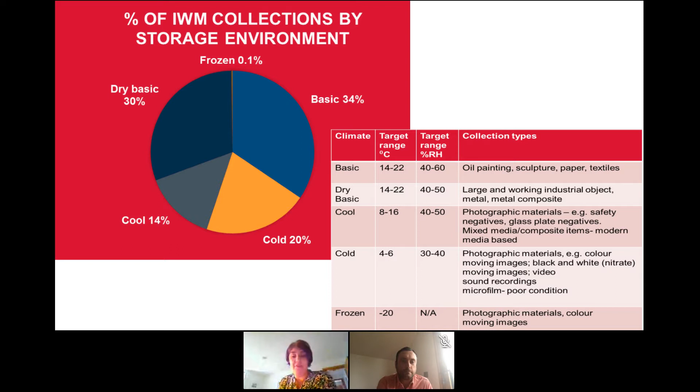One of the things that we've done at IWM is we've streamlined all of the environmental requirements into 5 very straightforward categories. And what we've found about doing that is it's far more successful when we work with other companies, either internal service providers or companies like Architype, when we've been developing new approaches. And over time, we've got more and more comfortable with the passive approach because we're seeing more and more evidence that it does exactly what we want it to.

I thought it was fun to just share a little bit of our journey with you from 2009. So we saw pictures from our art store, which was an internal reconfiguration of space. And you can see here what we're spending per square metre. And you can also see here how we're getting that cost down in real terms if you consider inflation and all of the other factors we're all facing, by just really consistently sticking with the logic of learning the lessons from past projects, travelling widely and finding out what the best approach can be.

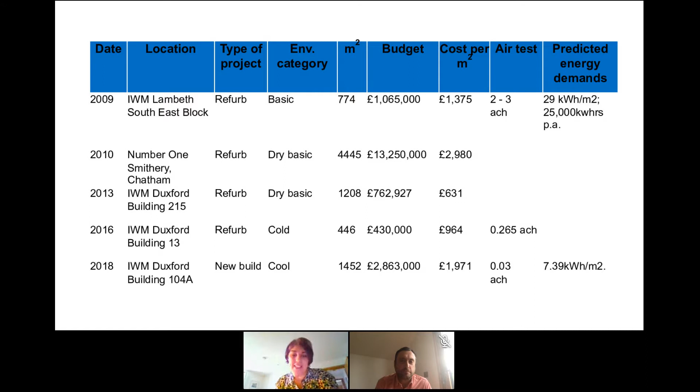And Mark will show you a great slide that compares, in the UK space at least, what we would expect, and we're now consistently below the expectations. I would also really advocate for trusting your own people. They know your spaces. They have skills and capabilities that you forget as a senior person who doesn't always see them doing their best work.

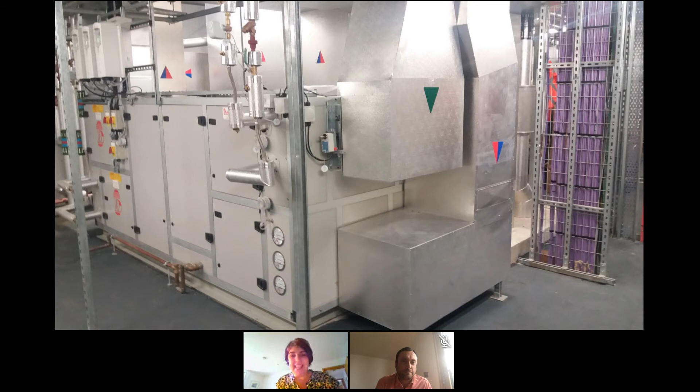So this is a great example. I sent the team off to look at other reference sites, and they came back with this photograph of the biggest plant room in a museum archive I've ever seen. This is one corner of it. We could have had a party in it. It was so enormous. And they came back and they were completely clear that they didn't want equipment like this. And they didn't want it because they didn't feel that our teams would always maintain that equipment properly.

So the idea of the passive house approach that we ended up with was really from our service teams going and looking at other stores that were spending a lot of money to meet very precise standards and coming back and saying, really, I don't think we're going to do this. So we prefer the passive approach because we feel like we're less likely to fail.

I think the other thing that we did well, and our technician team are always happy to connect and talk to technical teams in other places now, which is one of the great things that's come out of it, is that we trusted in the working practice. So there are other speakers who are going to talk about our work with barcoding. In fact, I went to Australia nearly 20 years ago now because they had implemented barcoding, and we looked at that very extensively, and then we chose to do it. And that gives us a lot of accurate information about our collection size and its movement.

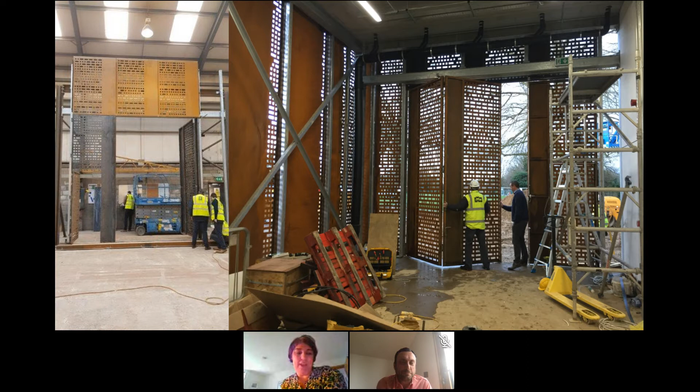They also went out, so you can see here, they went out to look at the loading bay door. The loading bay of this building had to do lots of different things. It had to be the plenum for our plant. It was on the corner of a very exposed site, so we needed to be able to move through it and for the door not to be blown off, which happens on some of our other buildings.

So again, just trusting those staff to really sign it off and come up with something really lightweight, minimising materials, and really giving them the confidence to say, yes, that will work. We're confident it will work. So our approach really has been to take any and every piece of advice from everybody else and apply it. And so we must now share that with you all.

I'm going to let Mark talk through the design approach, and then I think we should be able to have a nice conversation and pick up your questions about the more technical elements, particularly around environment. Mark.

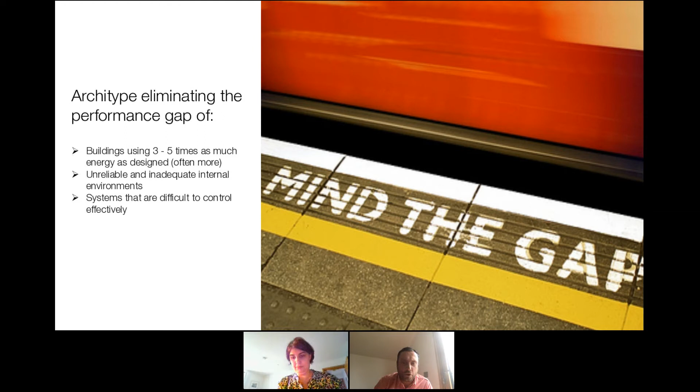So part of the integrated approach that we've taken, which is absolutely underpinned by those processes that Gail's just mentioned about co-developing building parameters with the design team, understanding building usage, and critically understanding operational procedures as well for the buildings. We utilize our specialisms in using evidence-based approaches. So that's employing strategies that we know work with our buildings, but also critically working alongside physics. It's much easier to work with physics than fight against it.

And then delivering in a fabric first approach, so concentrating on thermal performance and air tightness, which ultimately minimizes the risk of plant failure because we're providing passive environments. And critically, we are challenging standards as we go. We are confident in how our buildings will perform, and I'll demonstrate through a couple of examples shortly how we've successfully challenged and influenced those standards that have come out since our first work in this area.

Now, we came into this sector in an unorthodox way. But when we crashed into that sector, we found that our first project, which was Herefordshire Archives and Records Centre, had recently had its budget slashed to only 55% of what at the time the Arts Council were recommending for a building of that nature. So originally we thought, well, actually, is this project possible?

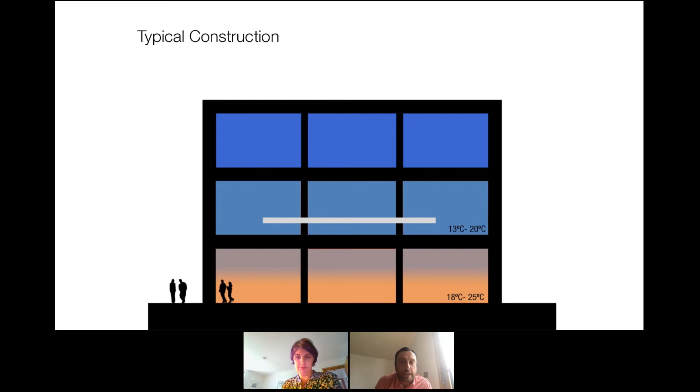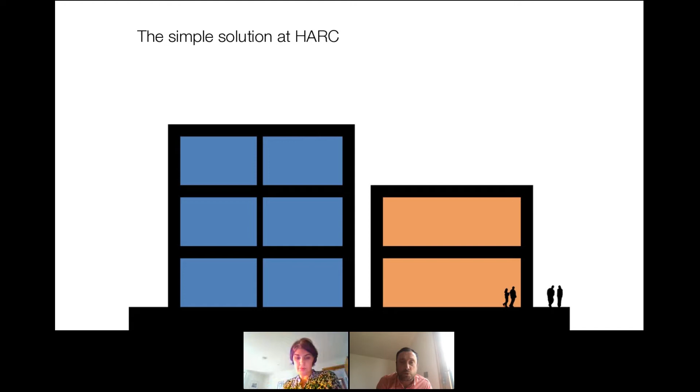So our radical but simple solution at HARC, the Herefordshire Archive, was to simply set the building out isolating each of the different environmental standards, and critically insulating each of those buildings or semi-detached elements of the buildings very well, including the wall between the two. The project was completed in 2014 and has been an incredible success. I'll share with you the performance from the buildings, but the target energy bills have been met, and also the target performance met too.

Now, critical to moving towards a passive solution is understanding the building physics around environments. And one of the things that we decided to do, very much inspired by the good work that had happened in Denmark previous to our introduction to the sector, was allowing the temperature to move and fluctuate across the year in order to keep a constant level of relative humidity throughout the year.

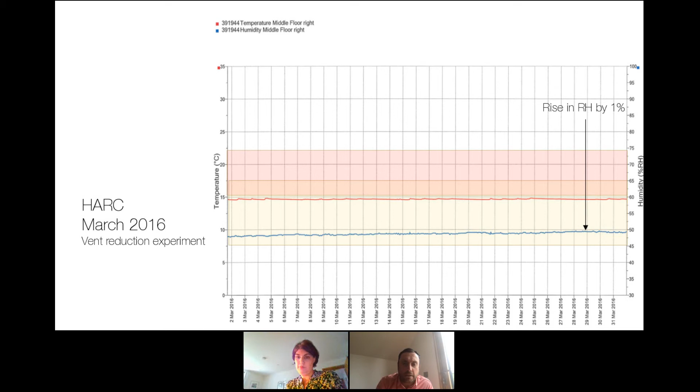Now, the other thing that we researched and were able to implement in our designs, and this particularly influenced how we moved on to design the paper store for Imperial War Museum, is that we soon realized that if there is a paper-based collection, then the moisture content of that collection has an ability to maintain moisture far more readily than RH. So a change of 1% in EMC is 13 times the amount of a 1% change in RH.

And we calculated that the maximum amount of water imbalance with the store that we were designing was about 10 kilograms of water per day. So if you multiply that out to a typical month, that would manifest in a typical change of about 0.2% in EMC, which only relates to a 2.6% change in RH, and that's the maximum imbalance of water, which is in the depths of winter.

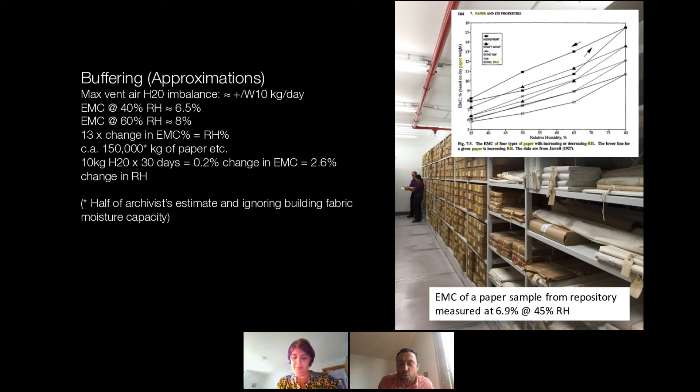So it was proving actually that the collection does most of the buffering. The standards and the guidance suggest that you use a hygroscopic construction, and we did that for HARC. Actually, where you've got a paper-based collection, moisture will find the passage of least resistance, and it will therefore be absorbed into the collection before almost all building fabric build-ups.

And then again, because these sorts of buildings haven't been done before, we have put probes into the buildings. We've put probes under the floor with Imperial War Museum, because we want to understand construction moisture and the speed of drying out, because we developed a system for both of our new build projects that avoided the need to have temporary tents above our buildings, which is often an expense to a project that can drift into the hundreds of thousands of pounds.

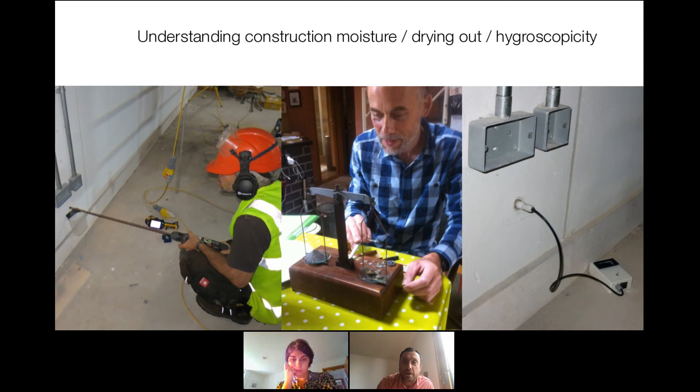So we developed a system that we were confident would be able to dry out quite quickly, and we've gained in the last few years a much clearer picture of how buildings, archives, behave in the drying out process, and we've been able to optimize our equipment further in subsequent projects. And in doing all this, we are hitting world-class performance

with our buildings. So Herefordshire delivered for the archive bit only 0.04 air changes per hour, which is approximately 250 times more airtight than building regulations. And the real skill I feel in what we're doing here is delivering this with really simple construction, just thinking about how it's built, and in this situation, working with the contractor to co-develop details. So we've got continuous lines of airtightness, etc. And we managed to better that performance with the Imperial War Museum project through lessons learned.

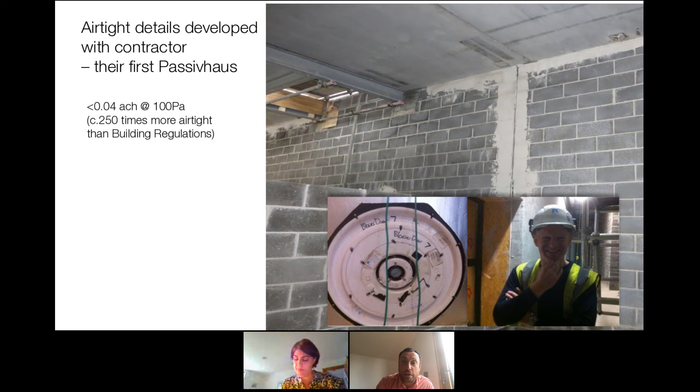And also, because external air incoming into the archive is the only real source of potential pollutants, and certainly the source of unwanted moisture, we've drastically reduced our air changes in our buildings. Historically, though, they have been required because of the risk of stagnant air.

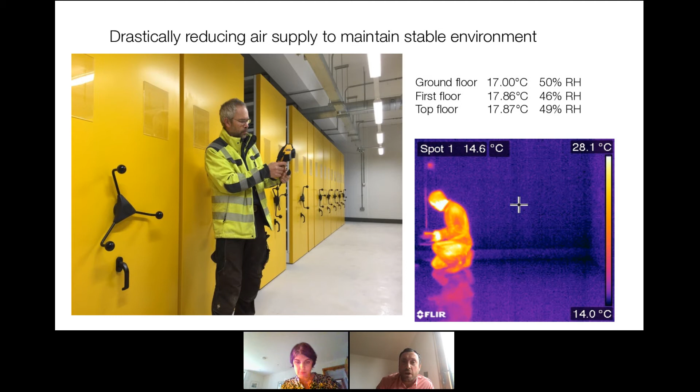And the thermographic image on the right-hand side of this slide shows how even the temperature is in our buildings. There's no variation in colour in that thermographic image. And the text there shows that we've got pretty stable temperatures and RH throughout our stores. The only reason why the ground floor is slightly lower temperature at HARC is because of some ground connectivity.

And then in terms of the design for the Imperial War Museum, we were fortunate enough to have a large site that we could optimize the building design with. What we decided was to put it predominantly on a single story, so that the archive could be thermally coupled to the ground.

And because Gail and her team were very keen to deliver lower temperatures within their selected bandwidth, we basically eliminated the insulation between the building and the ground, so that the ground acts as a chiller plate in the summer. The ground is about 12 degrees in the summer, so it's cooling the archive passively, and then in the winter it's actually used in reverse. It's used as a low temperature radiator when the temperature's lower outside.

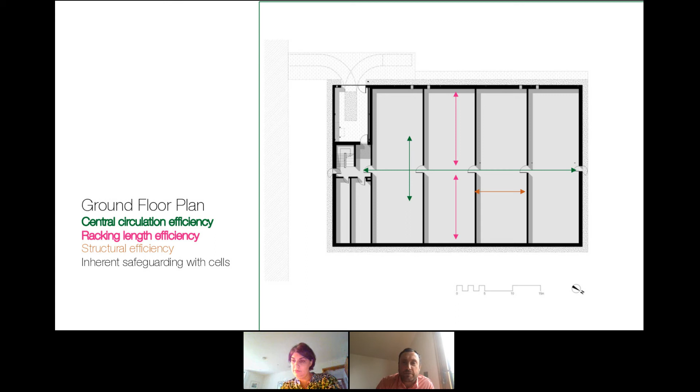So it was predominantly on a single story, but we also laid it out so that there was maximum efficiency from a central circulation route. We also made sure that the racking length was optimized as well, so it was the maximum run for that particular racking type in either direction, but also the superstructure of the building was designed so that the structural bays meant our roof loadings were delivered with a minimum amount of material and therefore carbon as well. And what that does is create a cellularized building which inherently delivers safeguarding, because we're subdividing it up into cells.

But then critically, the on costs as we go into the next 25 years, with HARC it's estimated to be around £500,000 with a healthy inflation rate for fuel, compared with an average of the study projects that we reviewed at the beginning of HARC that showed several million pounds worth of fuel being used in those 25 years. So again, a total saving at the end of 25 years of 8.3 million just on capital and fuel bill operational costs. And the same calculation on Imperial War Museum gives us a saving of about 5.4 million in that 25-year period as well.